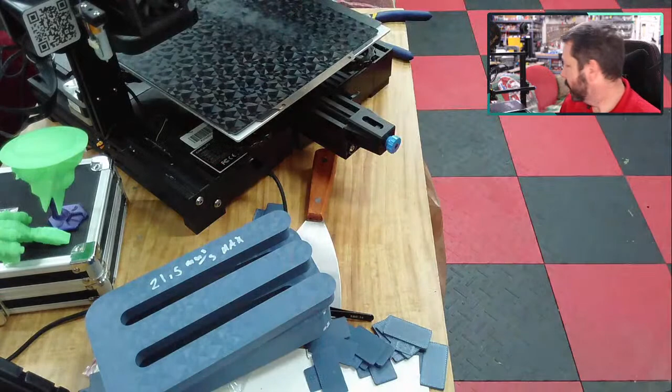We were doing these at one point, so you saw some of these last time. These were trying to get flow rate, not volume, not maximum flow, but just get the flow rate correct.

I printed a lot of those, and these were the built-in calibration test that Orca Slicer has built into it. I think they're probably from Bambu Slicer, which Bambu Slicer is based on Prusa and the Bambu ecosystem of printers. Orca Slicer is an open source version of the Bambu Slicer and Prusa Slicer mixed together.

Anyway, I think that's where these came from. And the idea with these is that you have a flow rate, normally in Orca Slicer, it starts out at 98% for PLA, or 0.98.

Then you print these little things, and each one has a number on it of an adjustment. So go up 10, down 10, up 5, down 5, whatever it is.

And you find the one that looks the best in the set. So you print about 8 or 9 at a time, and adjust your flow rate. Then the first pass is a large adjustment, and pass 2 you print it again after you make that adjustment, and you get a more fine-tuned adjustment.

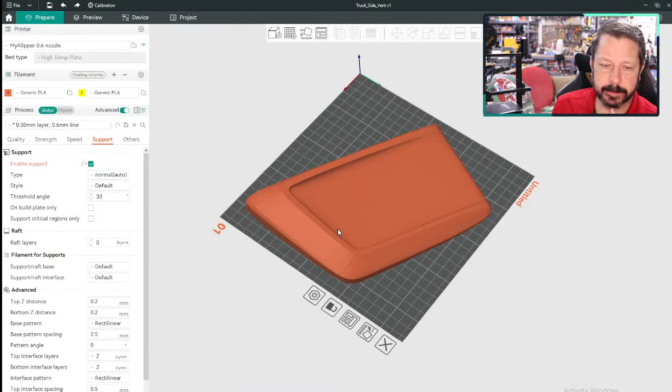All right, so let me see. Well, I'll let you see too, I suppose. Not the web, there. Oh, that's a little preview. Let's see, it would be in the filament.

So I ended up at 882, so 88.2%, pretty low for our flow ratio, which is flow rate in other slicers, or just flow - sometimes it just says flow. So I ended up at 88%, which is a little under what I would normally do.

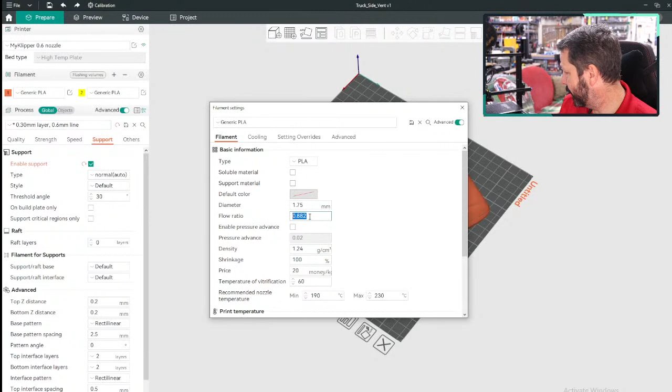Normally I do drop down below 100%. I don't normally go down to 88%, but I've been printing at 88% and it works pretty well, at least with the filament I'm currently using.

So it could change. Remember, the way that they handle it here is this flow rate is per filament, so, well, per filament type. Right now I've got this as generic PLA.

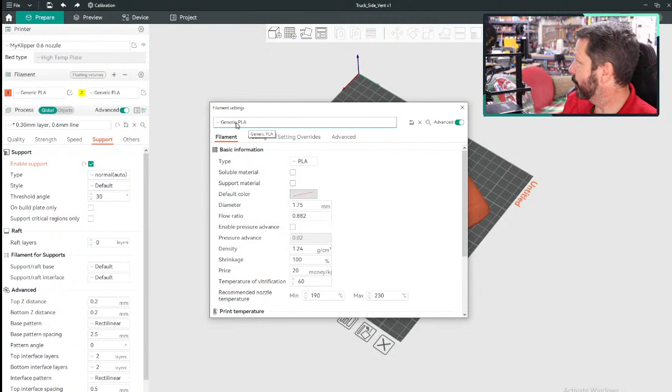Technically I should go in and change this, since this is for a particular type of filament of PLA. Now I'm not going to do that because I've got one roll of this filament and you can't get it anymore, so I'm not going to make a custom profile for what's left of this one roll.

So then, after creating or kind of fine-tuning the flow rate, I did this calibration. And this one I don't think we did on the stream. I don't think I showed you this one - maximum flow rate. So, all right.

Now that I know kind of how much filament needs to come out to create a certain line width and things like that, then now I want the maximum volumetric flow rate. And I did that with these, 2 of these.

So these little tests. Now we had been doing these, which would also do max flow rate, a bunch of these little guys. I'm not sure which one I like better yet.

This one is a little more realistic. It's an actual print, but it's only one wall, so you can kind of get away with stuff on one wall prints that don't really work on multi-wall or infill and all that kind of thing.

So I'm not sure, these are slightly faster, so you could do these. The idea with these is that you weigh them, so you need a scale that's going to give you hundredths of a gram resolution. So there's that downside - faster, but you need some equipment.

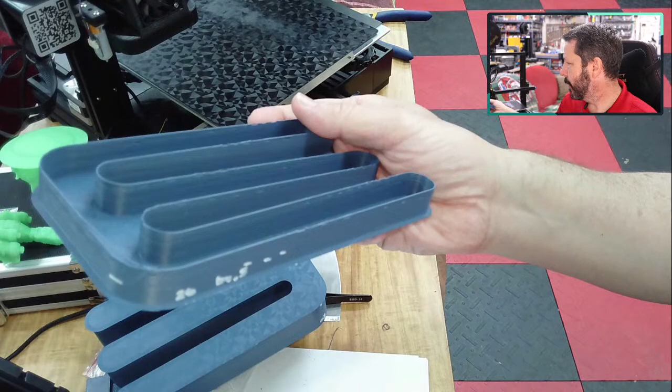You got to do some plotting, put it in Excel and figure out where it starts to drop off. This one, you just hit print and let it go. This is another one of the built-in calibrations in Orca Slicer, also in Bambu Slicer, plus I've seen these outside of these slicers where you can use them on your own.

I don't remember if the Teaching Tech site has this for volumetric flow rate, but it might. So this is the one I printed first, and I wrote on it 5 to 20. The idea here is maybe you can see those little lines - there's some lines across here that are indicator lines.

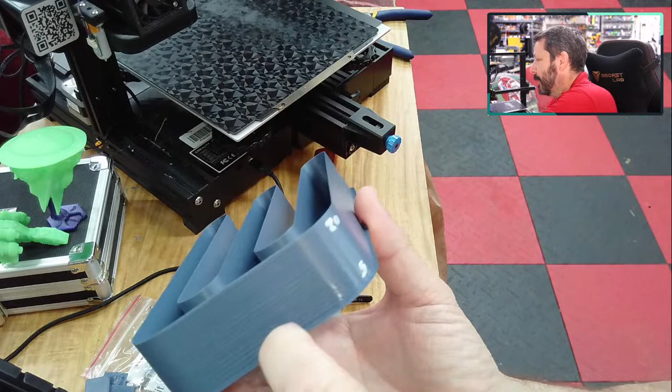The idea is that you start at one flow rate. So I started at 5, really conservative, and then you go up by, I think, 0.5 cubic millimeters per second per line here, not per layer. There are some artifacts down in there - those are lines, every one of those lines marks an increase in flow rate. This one went from 5 to 20 cubic millimeters per second.

Now I'm not certain that it's actually 20 cubic millimeters per second because I had to do some line width modifications. The built-in version of this assumes you have a 0.4 millimeter nozzle, and this printer has a 0.6, so I'm not certain it's actually correct, but I went with it anyway. So I know it's increasing the flow rate, I just don't know if it's actually increasing to 20 or some number slightly less, because of the different size nozzle I have. But I tried to adjust for it.

All right, so this one looked fine the whole way, there was no problem. So then I made another one that started at 20 and went up to, I think, 30.

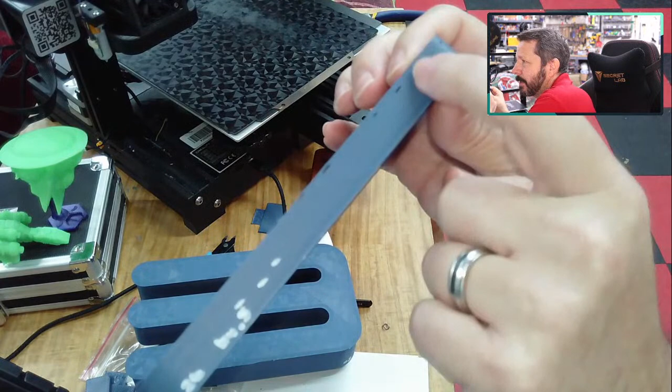And that's this one - I didn't even finish yet because you can see, right there, it started having gaps. So it was not able to supply that much molten filament at that rate. So 20 was okay, but you probably can't see on the camera, right where I put these dots, those were not complete holes, but they were definitely under-extruded. So it was struggling at that point.

So what you do is go and find what layer that lines up with. You can kind of almost see the lines on that one, and this one lined up with the 1, 2, 3 - the last one was the third indicator. So I started at 20, went up to 20.5, went up to 21, went up to 21.5, and then beyond that it struggled. So that told me that if my numbers are correct, the maximum volumetric flow rate is 21.5 cubic millimeters per second.

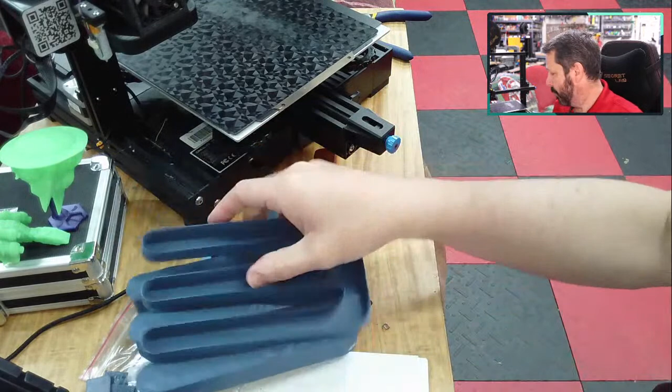Now this one doesn't change temperature, so that's at one temperature. You know, these other ones give you an array of temperature changes and flow rate changes. So which is better? I don't know.

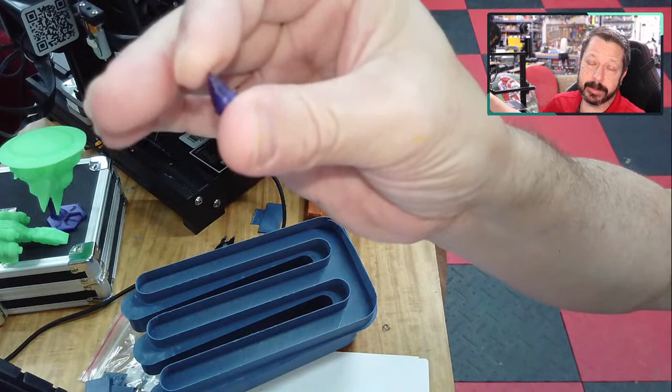I kind of like this one a little bit more because here you can actually go in and measure the weight - well, you could measure the volume if you had a graduated cylinder or something, you could measure that volume I suppose. But you can measure this exact weight and figure out the volume. I kind of like this one a little more, but you do have to have some scale. Now this didn't cost much, this was like $10 off of Amazon, so it doesn't cost a lot, but you do have to have that. Otherwise you won't be able to do anything with these other than tell which ones printed and which ones didn't.

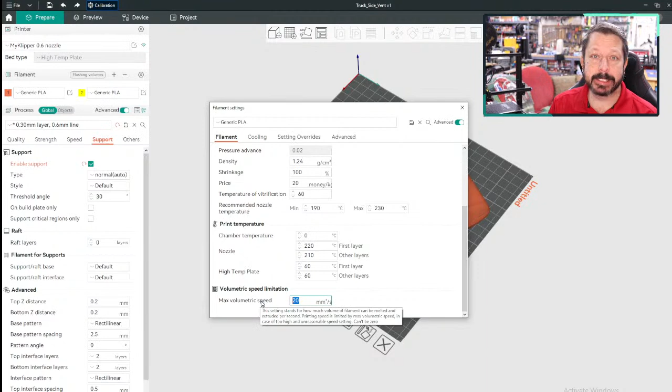So I did that, and what I ended up doing - let's see, I don't remember - on my filament, I set the max volumetric speed. I don't know why they call it speed, but they'll set the maximum printing speed based on the amount of filament you can flow. So I set it to 20.

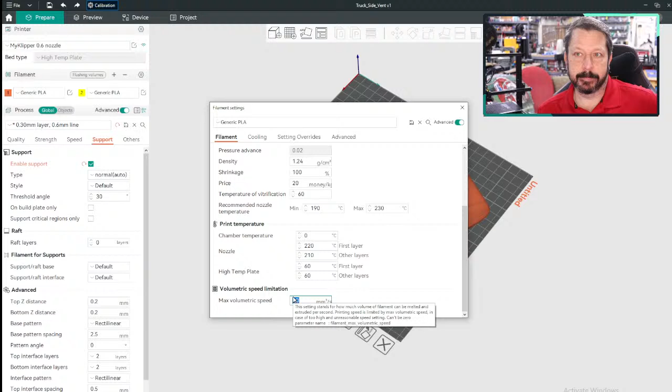So I didn't go at the 21.5 that it maxed out at, I pulled it down a little bit. Also, I'm not quite sure those numbers are even correct. So I set it to 20. What this does, and you can do this in Prusa Slicer too, is it will never, when slicing, try to produce speeds that go beyond needing that amount of filament flow rate, or volumetric flow rate.

Now, that's for one printing temperature for that particular filament roll. Probably I could drop down to something more conservative, like 17 or 15, and it would be okay for all the PLA that I would print.

All right, what else did I do? I did this one. There's no documentation for it, but it does generate the file. This is calibration mode VFA. There's no documentation in the tutorial for what that is. VFA, I've heard it called two things, vertical fine artifacts and very fine artifacts, but most of the time I think it's referring to vertical fine artifacts.

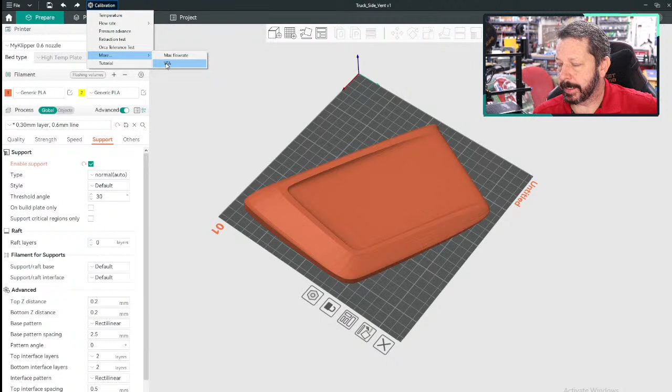The idea is that particularly on direct drive printers, but on other printers too, you might get surface imperfections that aren't due to anything other than the motions of the stepper motors themselves. The stepper motors move in distinct steps, and those combinations of steps between your X and Y, not necessarily Z, can create artifacts in your print. Also on direct drive printers, the stepper motor is almost directly attached to your filament, whereas on a Bowden tube there's distance between, the filament's got this big spring or capacitor of filament between where it touches the feeder motor and where it comes out of the nozzle. But on a direct drive, that's very direct, so you can even get artifacts from the extruder itself.

So I printed this thing, where's my right camera? Printed this, and it sits in there, I think, this way. So the front of the bed would be like this. So it'd fit on your bed like that. It's got all these different angles: 0, 45, 60, 30, and 80 and 90 or something like that. I don't know what all the different angles are.

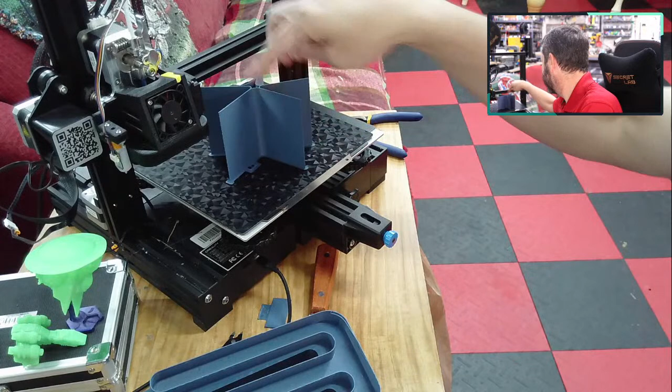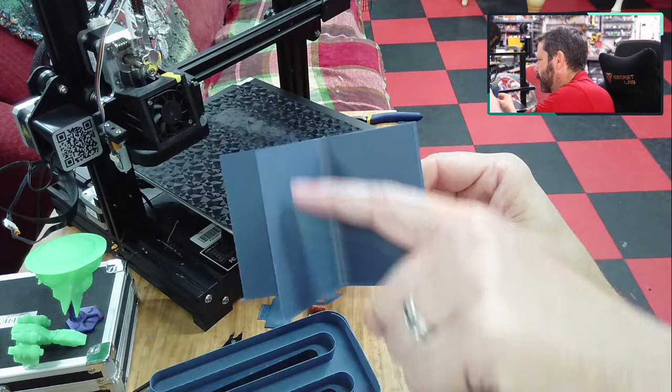But it will use different combinations of your X and Y stepper motors, basically that's what it's doing. Then it changes printing speed from the bottom to the top. At the top here, it was printing or trying to print, I think, 200 millimeters per second, and it started at something like 20 or whatever. What I'm assuming the goal is, is that you look at the combination of all these sides and try to find where the surface finish is best across all 5 orientations, and then set your max print speed to that number.

In truth, it's very similar on all of them. There's not one that's clearly slow is better or fast is better across all 5 different combinations. So none of them were horrible. I don't know if you can even see the vertical fine artifacts on the camera. Let's see if I can make it focus on that. No, it's not going to, because they're very fine artifacts.

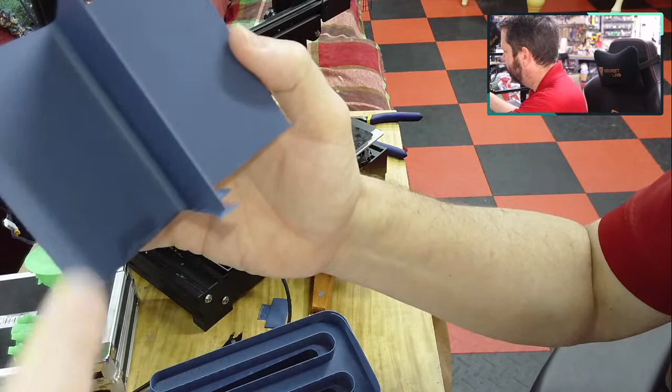But if you were holding this in person, you could see little lines. Let's see if I can get them the right way. They're little vertical lines parallel to each other in this print, and they're closer together down here. They spread out a little bit, and actually the faster I go, the better those artifacts get on that one. But on others, there's a band in here where they're kind of there, and here they're actually really pronounced.

In general, the faster it's printing, the less those artifacts are noticeable. I can't even show them really well because they're so tiny, but if you're having an issue and they bother you, then you might try changing speeds or orientations of the part, because different orientations will have different effects.

Hold on, let me respond to this message real quick.

Just have to fill this out.

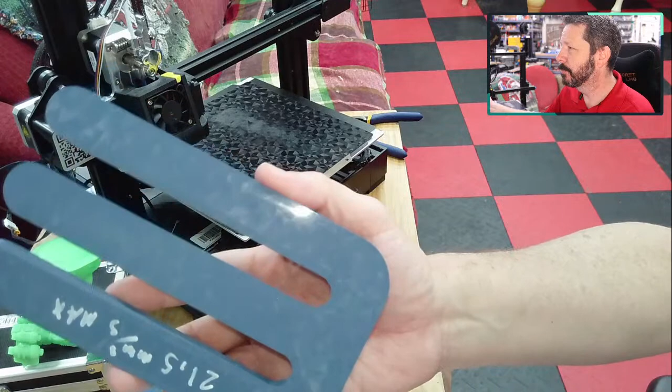So I printed those. You might notice this area right here. I'm liking this sheet, the PEI, I don't know what it's even called, but the pattern sheet. It's the thing that generates the cool textures on the bottom of your prints, like those shiny spots. Maybe this one shows it up better.

So the problem I had was I printed a pressure advance test where it's just single layer lines going across here, and then it printed numbers on the bed, and they were squished too much. Particularly back in here, this wheel or this corner of the bed was too high, and these numbers were really squished in, and they would not release from the bed.

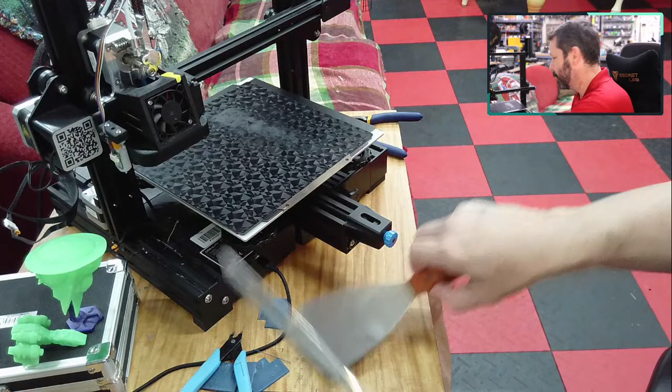So I had to scrape them off of the bed. I tried all sorts of different scrapers to get them off of there. Ultimately, this one is the one that scraped them off. But in the process of doing that, it scratched the bed as well. So now anytime I put a part here, it's not going to have the nice texture on it anymore.

So that is one downside to these beds, and all the beds that have some kind of texture on them: stuff that's only one layer will potentially not be able to be removed from the bed, and you have to scrape it off, which might scratch your bed surface. So be careful with those beds.

I did order a different one sort of because of that, but there's still plenty of room over here for printing and getting the texture, and it works fine. I have printed stuff on top of that, and it does work fine as far as adhering, but I don't get that same texture on the bottom of it.

I don't think I have an example of that right now, though. Oh, actually, this piece - I don't even know if you'll be able to tell. Right in here is where it overlapped that spot, and it's not as clean. Some of the texture even shows through. So it's not like a total lost cause, but I don't think you can even notice it on the camera.

So you do have to be a little careful with those, even if it was on this side with the textured PEI. But I bought another one of these, it hasn't come in, I think it comes in today. That has a carbon fiber pattern on it, so I'm going to try that one. It's actually PET, this one's supposedly PEO.

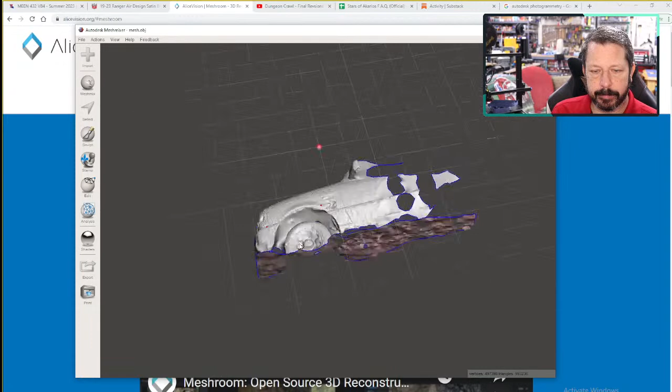Again, Mesh Mixer can struggle sometimes with larger amounts of geometry. It's translated in a weird way, below the ground plane. So we could go into edit, transform, and bring it up there, make it more flat, something like that. That looks good. And then we could work on getting rid of some of this stuff that we don't want.

It's thinking. Sometimes, like I said, Mesh Mixer will want to crash on you with these larger meshes, which it is not right now, but it's definitely acting sluggish. It could be because I'm not giving enough resources to Mesh Mixer since I'm streaming and everything. When I did this without streaming, it actually worked relatively normally, there wasn't a lot of lag. I just think it's locked up.

But anyway, what I did is I went to analysis, and there's an inspector in there. The inspector will tell you, hey, all of these parts have holes or whatever, and I just went and auto repaired all of them. I think it left one or two, and yeah, it left one here, so I said done.

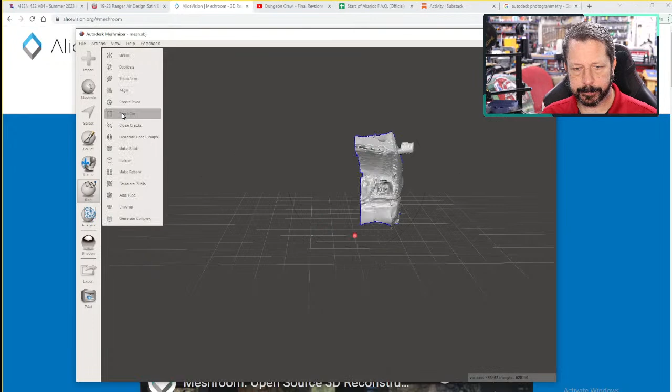And then I didn't want that stuff on the bottom either, so we'll cut more like that. And then I chopped it off here, just to get rid of extra stuff. So now I've got more focus on what I want.

You can also see how lumpy the mesh is, particularly right where I wanted the data. But I did that. I think I might have run inspector just one more time to see if there was anything, and it said there's nothing. It's fine, it's an open mesh, which is fine. There's nothing on the back, but that's okay.

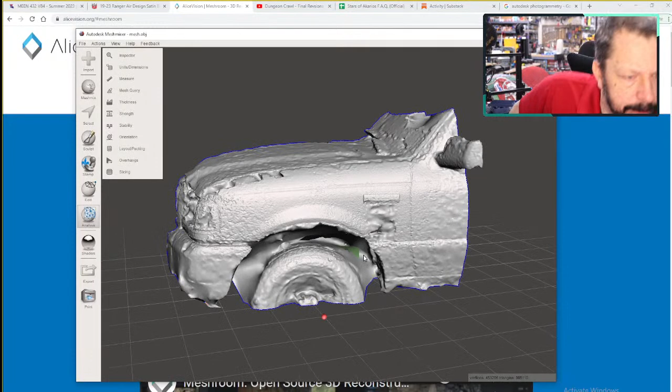I think it scaled really weirdly. Let's see. Yes, it's 1.64 tall, so that could be meters, I guess. 2.63, I don't know if that's meters though. So it's got some scaling issues, but I saved that.

Because in the Meshroom piece of software, it doesn't really have any way to scale anything in there because it doesn't know how big a truck is or how big a tree is. It doesn't know any of that stuff, so it just tries to generate the geometry, and you have to go scale it later in some other piece of software to get it the right size. So we'll do truck 1. Oh wait, but that's saving the project. I want to actually export this as a STL file. There we go.

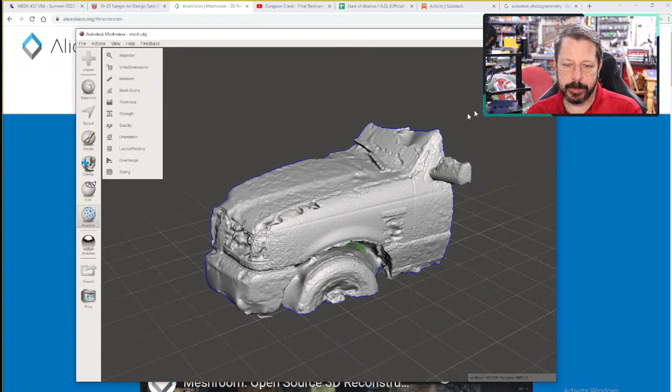Okay, now I have a STL file that I should be able to bring into Fusion 360. I don't want to save any of that, that's fine. Oh wait, so Fusion 360, here's what I did, so what I ended up with anyway.

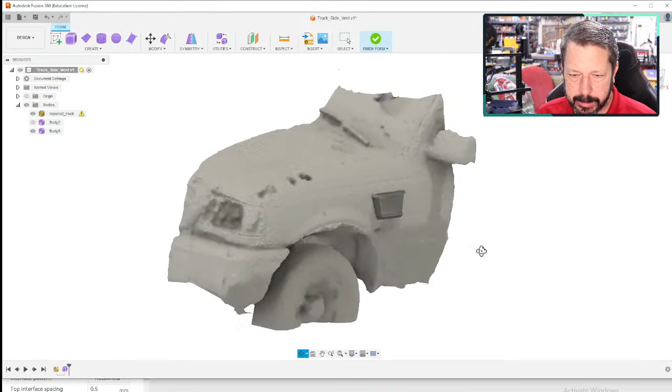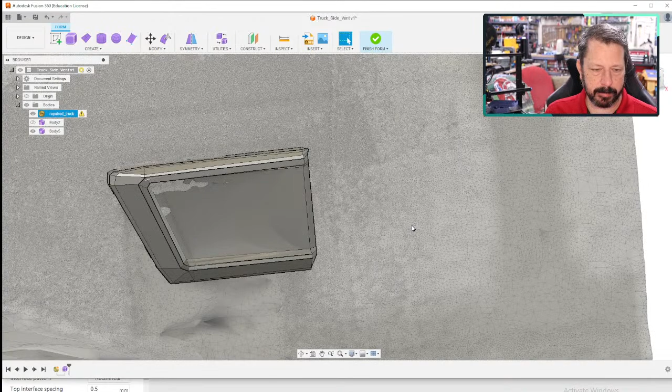So there's the truck, that's the way I chopped it up the first time I did it. And then there is our little side vent in the box view. So remember when we were doing the forms last time, usually it works better to model in the box view and then check the smooth view. So let's turn on some of our lines. There's the box view, and there's smooth view of what it would look like. So that's what I modeled.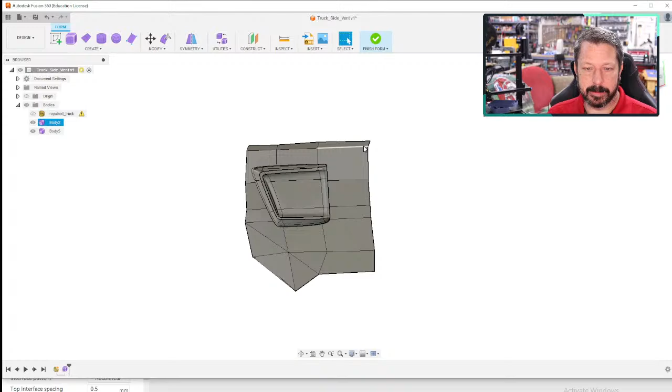Now, the big holes right where I wanted to put this thing, how I dealt with that is I just put a little patch panel on there. So I used the same form modeling processes that I used before and dropped on a little patch that covered up the hole, just so I could model this a little better. Most of the time I had that patch off once I was done with it though, and I was just using this view. And then even a lot of the times I was just using this view.

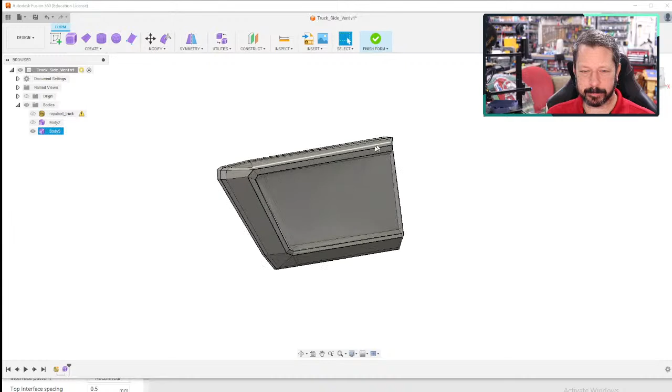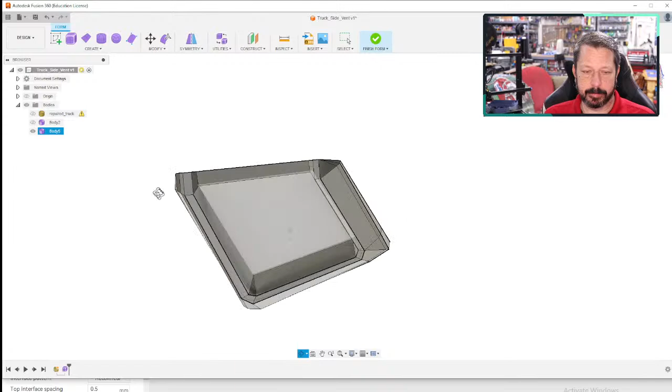Well, actually this view, I guess. Now this model has some problems in the edge loops that I was dealing with, particularly when I went to thicken it. It got really kind of messed up, and I had to do some manual editing inside here to get it to do the export.

But we did end up with something that was usable. So I haven't printed it yet. It does fit, that was what was on here. I haven't decided how I want to print it, or if I want to work on it more and print it. You can see when I exported it, there are little facets here, and I believe I could get a better export from Fusion 360.

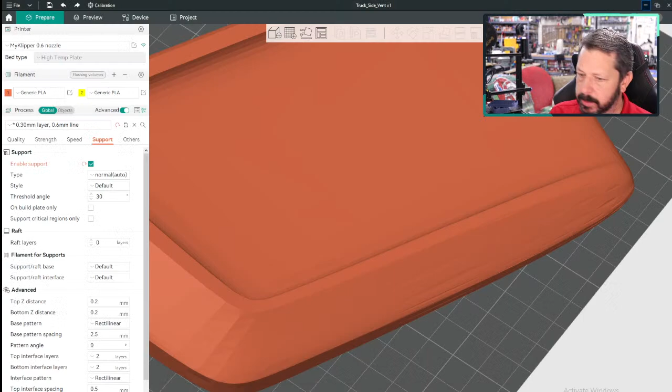In fact, maybe we could try that. Let's see if there are options here. So I just did this, and it doesn't really give me any options, does it? So what I need to do is go in and see if there are some options I can set on the mesh density when it goes to export, because I do have some issues on this thing.

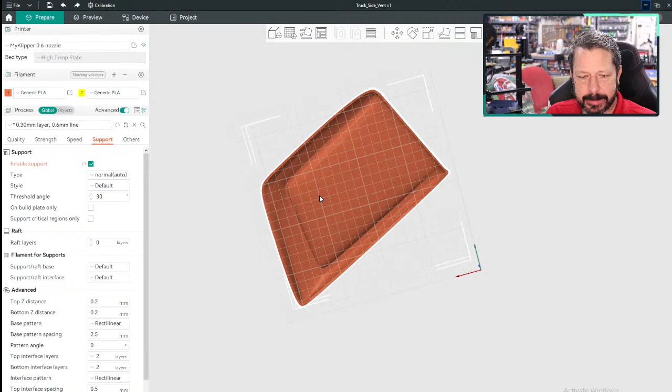Little stretched out holes and things like that, facets in here that I don't really want. Now we could print this and then Bondo or whatever over the top of it, but I'd like for the print to be closer on its own without having to finish it myself. So it does fit, but it's going to be filled with support material if I do it this way. So I haven't really decided. I could print it on its end, but then there's not a lot holding it up, so I would need to add a lot of supports to get it to not wiggle around when it's printing.

Right now it's printing this way. So I haven't decided how exactly I want to print the thing on here.

But that's the general idea of photogrammetry, which can be free using stuff you already have. Or there are paid versions too that use photogrammetry, like Polycam, and that photogrammetry doesn't happen on your phone, I don't believe. I'm not 100% sure, but I assume it sends it off to their servers. I can't imagine your phone being able to process the photogrammetry in the amount of time that it actually does. So I assume it sends the pictures you take off to their cloud, and the processing is remote. That's why I don't think there's a free version on Polycam anyway.

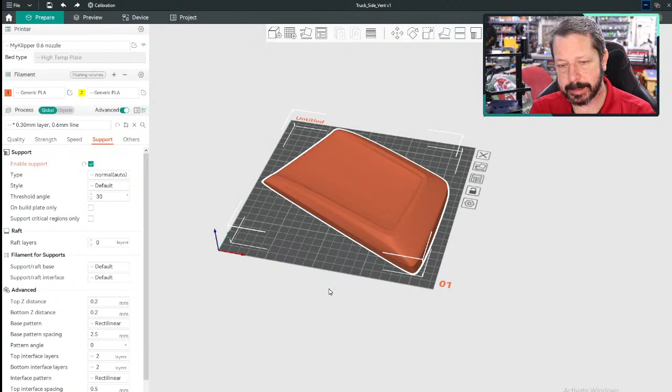The Meshroom is local though, so you don't send your pictures off anywhere. They stay on your computer, but that also means your computer has to do all the work processing those pictures, and that's why it has limitations on certain graphics processors and things like that having to be available for it to really do the work.

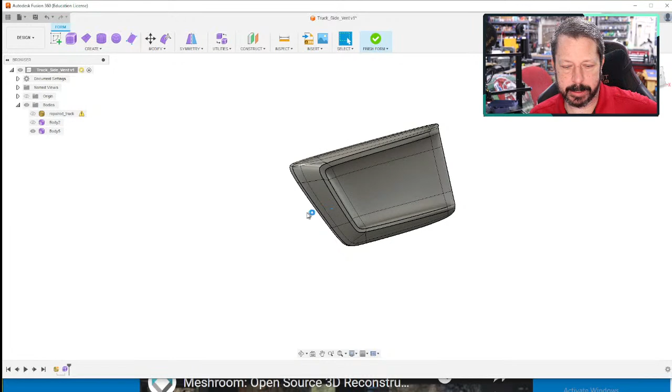All right, we do have a few minutes. Let's close—actually, let's leave that open. Let's close Fusion. It might take a while for it to close because it's got all this data it's got to save. Yeah, so it'll close eventually.

If you wanted to try this photogrammetry out, one of the optional assignments can be photogrammetry, or maybe you could even do your technical report on best practices for photogrammetry, using whatever Meshroom or Polycam or maybe some other piece of software. You can get some good results, it just takes longer on the processing side of things.

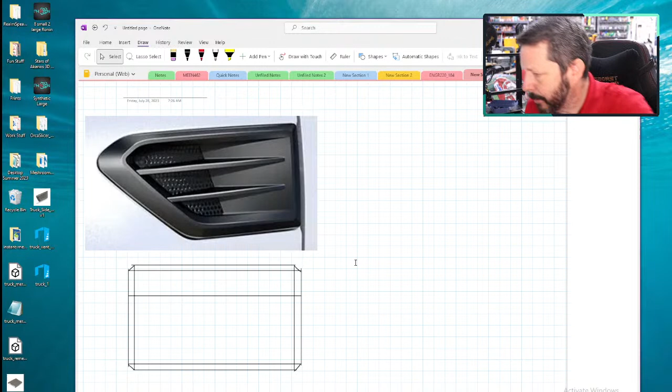So I couldn't just have a rectangle. So I was matching up. I really need to find the pen. I do not know where it ended up. Huh, I don't see it anywhere. I'm sure I put it in its holder.

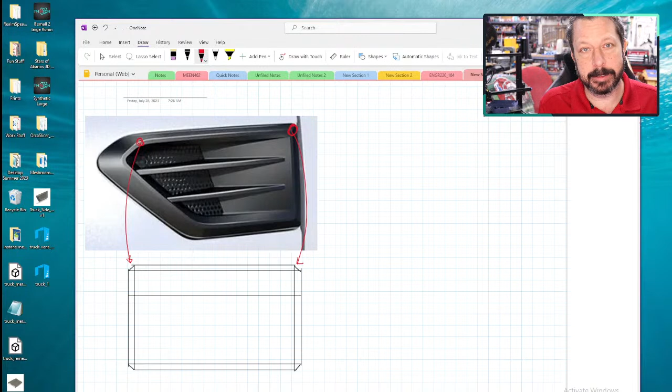So what I was doing was matching this corner to here, this corner to actually here. So I would start out—when you create these forms to start with, you start with a rectangle usually. There are ways you can make faces and different shapes, but I've always started with a plane and worked from that, and the planes are rectangles. And then this corner maps to this little spot, this corner maps to here, and this corner maps to there.

So if you can think ahead of time on how you're going to have to divide up your plane, do the insert edge and that kind of thing, it might help, because I ended up with a few issues on mine when I went to complete the form.

You can model and deform the plane and do all kinds of stuff to it, but if what you created can't be converted over to the B-reps, which are more the parametric side of Fusion 360, then it doesn't matter. You made the form, but you can't actually do anything with it.

You can't export it as an STL or anything like that. So I was having issues after I thickened it to make it solid - things intersecting, self-intersecting lines and planes that were overlapping, stuff like that. It was because I didn't spend enough time beforehand thinking about where I'm going to have to divide up the plane, and I was doing it more on the fly.

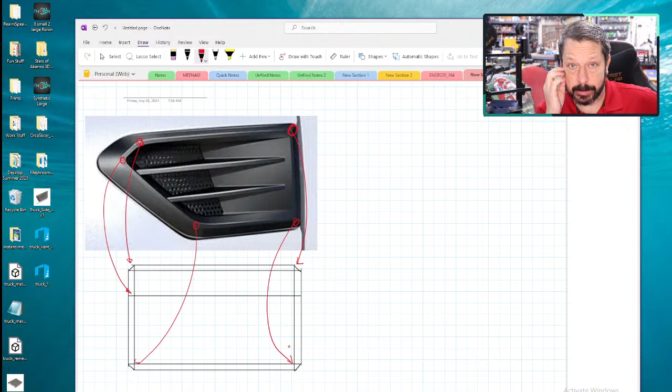So it would definitely be easier on the whole process if you want to try something like this, if you spent a little bit of time trying to map out how you're going to model it. All right, let's go change the nozzle on this thing.

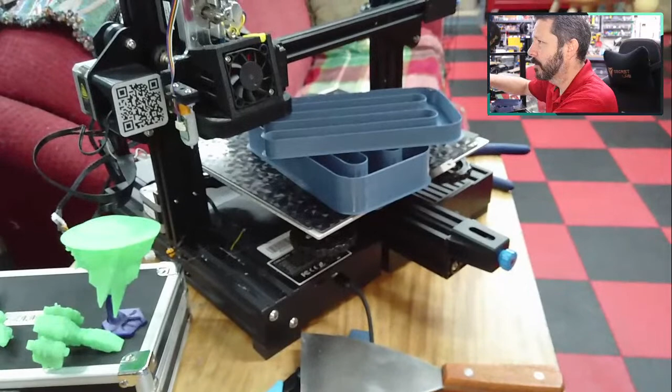Changing the nozzle, we've done that once on the stream before, but let's do it again. One thing you need to do is take the filament out. If you don't take the filament out, when it's in the nozzle it's not going to release the nozzle, so you'll have problems.

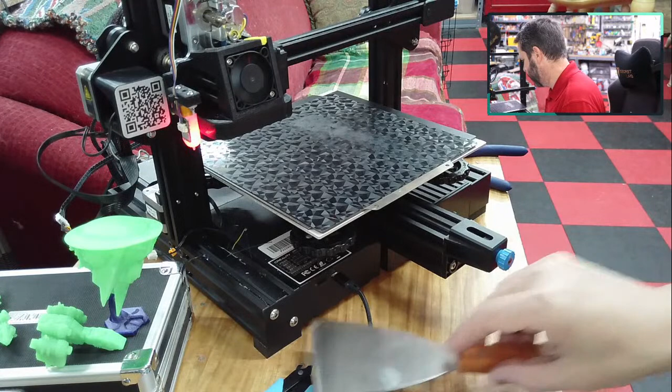So we're going to heat up and try and get this nozzle put in there. I don't know if we'll get to print because I don't want to take too long - we have about 20 minutes left. Sonic pad's booting up over here, so I can't heat it up until the Sonic pad's booted up. That's one tiny downside, normally I just leave it on, but it takes slightly longer to boot up. It's booted up now.

So I'm going to preheat. That's PLA, so I'm going to preheat for PLA and let it do that. I'm going to see if I can get the camera in a usable spot so you can get an idea of what's going on here. So you'll have to move.

That shroud is going to be in the way for a lot of this, but you can also see more of the scratched up area. I'm going to need a wrench and maybe a pair of pliers.

You get those little tiny flat wrenches with the kit, but they are tough to use, so I'm going to use a tiny little wrench instead. I need a metric set of these, but this works close enough. I think this is 9/32 for that particular size, and that'll work for the replacement nozzle too.

It's close enough, but the chances of you having a 9/32 inch wrench floating around are not great, so I happen to have one. A lot of times you're stuck with those little flat wrenches, which will work. The main thing is you have to heat up the nozzle to break it loose, and to remove the filament, which I think we're ready to do.

Oh, all right, so the filament snapped. The filament snapped off at the Bowden - well, not a Bowden tube, I guess it is, but it's not the same as...

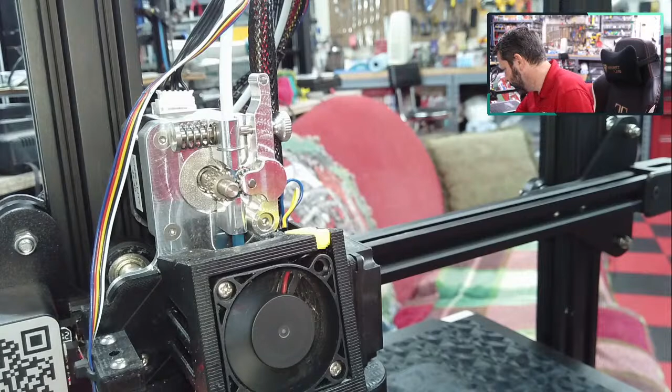All right, so let me show you what I've got to do now. Now that the filament broke off way up there, I could just try retracting it, I suppose. Let's control extrusion, retract, and see if it'll spit it out the back.

Yeah, it is. All right, so we'll just do that. Normally I like to manually push filament through and then pull it out, but I can't do that now. So now I've got something to grab a hold of back here. And all right, now the filament's out.

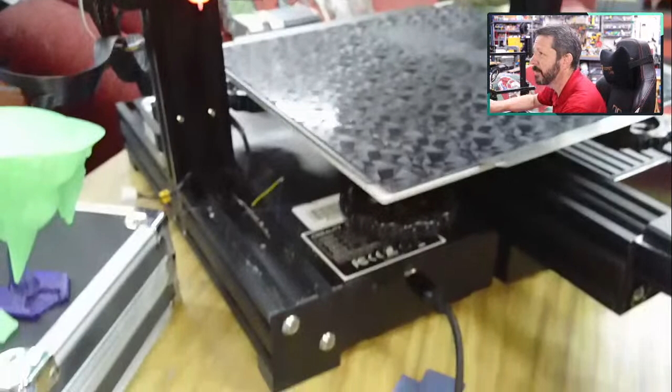Now what we need to do is take our - I really don't know if I can get down in there very well. Oh, you know what, I could raise the Z-axis though. Let's see, move Z. Oh, I have to home everything first - I have to home things before I can move things.

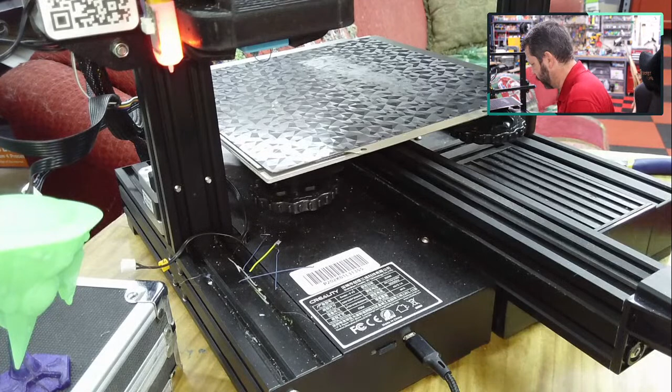I'm looking for my tweezers. Not seeing them. Everything's, oh, here they are. Everything's kind of moved around right now, so it has to home the Z.

Okay, now we can move Z. Well, it's going to move up on top. Let's see. You can.

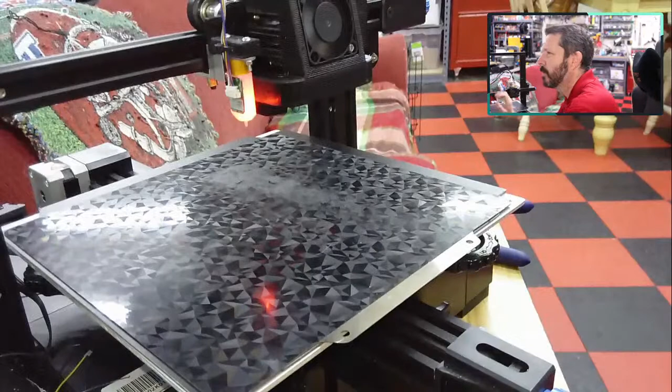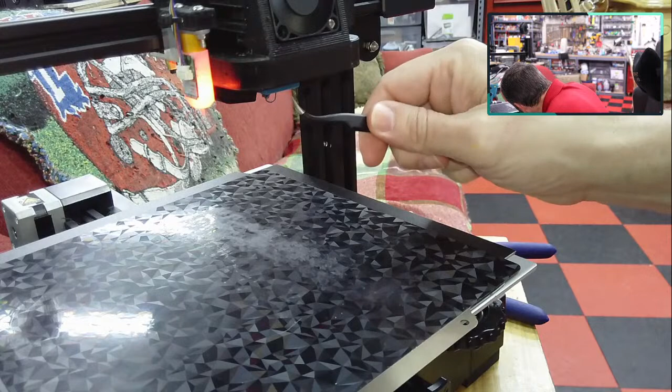Okay, now we're getting close to where you can at least kind of see what's going on. So I got to remove the little silicone part, which itself is not usually too hot, but everything around it is. So got that out of the way. Actually, it's really pretty hot too.

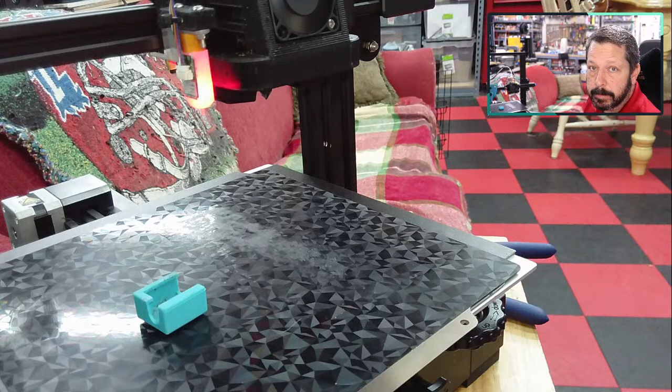Now, if you don't heat the nozzle when you go to break it loose, you stand a chance of either shearing the nozzle itself. This one's a steel nozzle, so that's probably not going to happen, or twisting or shearing your heat break. So it is best to heat up. And what I was saying with those little wrenches, even this one's not a big wrench, those little flat ones get hot so fast that it's tough to hold them long enough to actually break it loose.

Actually, that's the wrong end. That was the 5/16 end. So there we go. Now, sometimes you have to hold the heat block while you're doing that. I didn't need to do that for this particular case.

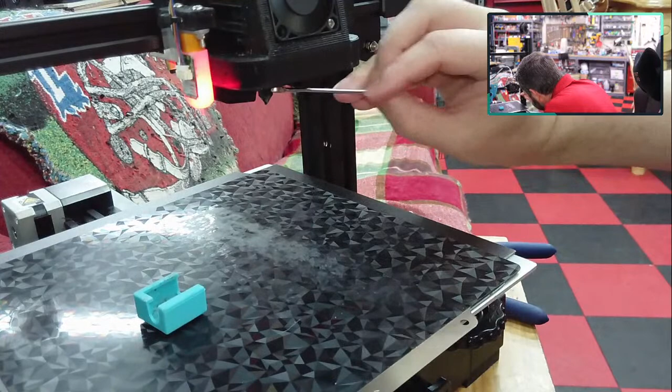I'm very aware that this thing is hot. You're tempted to just reach up in there and grab the nozzle and twist it out, but it's 200 degrees. So we're gonna... there it goes.

Alright, so, see, I should have thought about that. It got some gunky filament on my bed. I might have another spot that's going to be messed up. So there's our old nozzle. We're going to put it down, but you have to be careful where you put it because it is hot and it could burn the surface that you put it on.

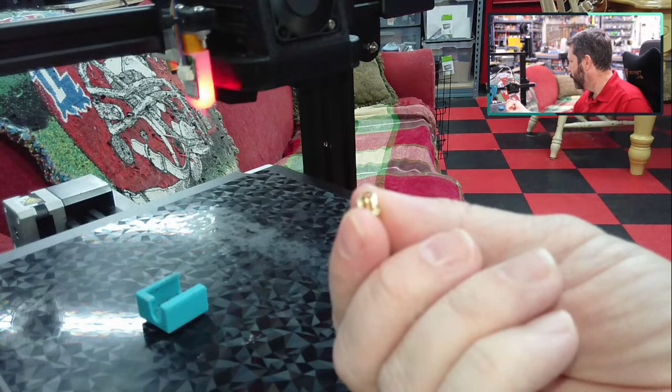Where's our new one? Alright, so here's our new one. I'm going to put... you can't focus on that. Now, you don't have to have the hot end heated up while you initially start the nozzle. But once you've got the nozzle in place, then you do have to heat tighten it. If you don't heat tighten it, you're going to get jams and leaks.

But if you're reluctant to reach in there and get it started by hand because it is 200 degrees still, then let it cool down, start it by hand, and then come back and heat it back up and tighten it another. Once you get it snug, then tighten it another, I don't know, 1/8 of a turn or so to really seat it in.

So right now I'm just... alright, so it's snug. It's touching the heat block now. Now is when you would want it heated up. Mine's still heated up. Now you have to grab the heat block to hold it back, because if you don't do that, that's when you can shear off your heat break.

And tighten that 1/8 of a turn more. If you don't do that last 1/8 of a turn, and it doesn't have to be exactly 1/8, I'm just saying you need a little more tightening done. So if you don't do that, the backside of your nozzle where it would touch the heat break is not going to be tight enough against it, and filament will come out in that gap. Even if the gap is very tiny, it will still squirt its way out there, and you'll get clogs and all kinds of problems.

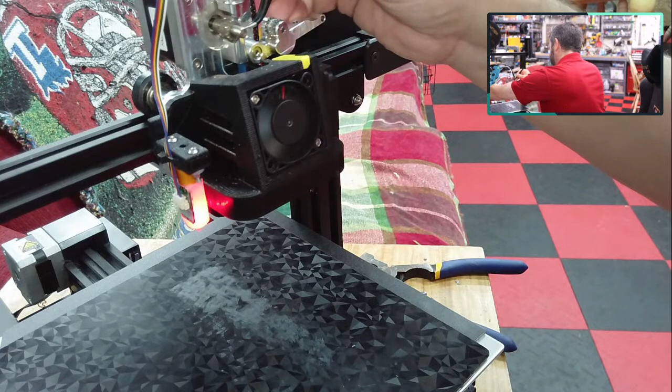So I'm loading filament. I have to usually take this little bar off to guide the filament into the tube here. Every great now and then it'll line up on its own, but usually not, so I usually have to do it this way. There we go. Now we got to put our bar back on. This is what holds the tension on the filament, holds it up against the drive wheels.

Let's extrude some filament and see if we can make sure the filament comes out of our nozzle. Let's see, where is extrude in this thing? Control, extrude. Let's do 25 millimeters.

All right, stuff's coming out, so that's good. Let's do another little purge there since it didn't all purge out.

So a couple of things: we've switched from hardened steel to brass, so we have to be careful with abrasive materials. It also means our PID tuning is totally wrong, because it was tuned for steel, which has a very different thermal conductivity than brass. So we should actually be able to print a little better with brass, as long as we don't do abrasive stuff.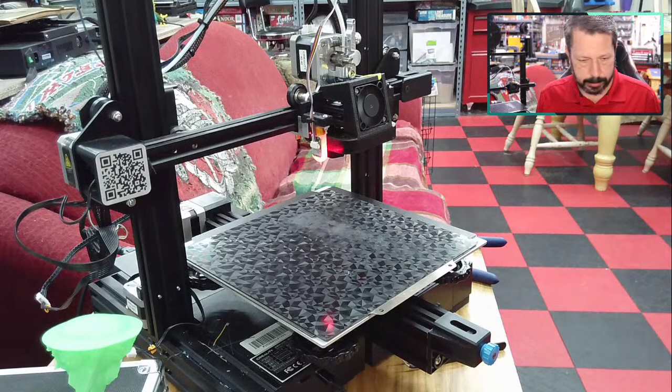So to do a PID tune with Klipper, remember it's actually pretty straightforward. Let's see if I can get us into Klipper. I don't know which address it's on. There we go.

Klipper has a PID tune macro. We can just click that button and it will send the G-code commands to do the PID tune for us. Apparently part of it is homing. I don't know why it needs to home to do a PID tune, but it's going to.

So it's homing right now. I don't know the defaults on that. Once it shows us, I think we'll see what temperature it's going to go to. This is just a default PID tune, so you might want to do one with more iterations or to a specific temperature. It looks like it's going to PID tune to maybe, right now its target is 195, so I don't know if it's going to go down to 195 and then up, or if 195 is the target.

Oh, it looks like 200 is the actual target. So it was cooling off, now it's going to go to 200, then cool down to 195, and oscillate some number of times. I don't know what the default is for this little macro, but you can kind of see it in our heat window here.